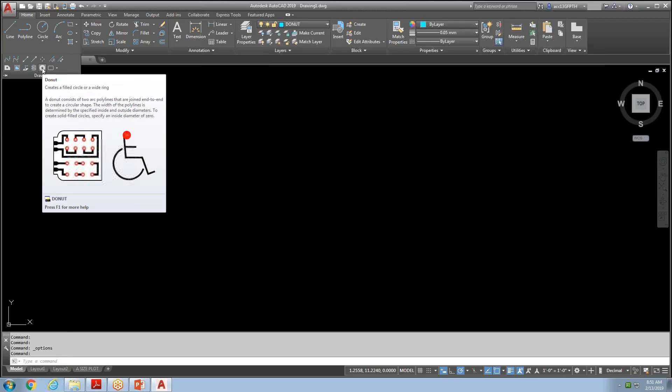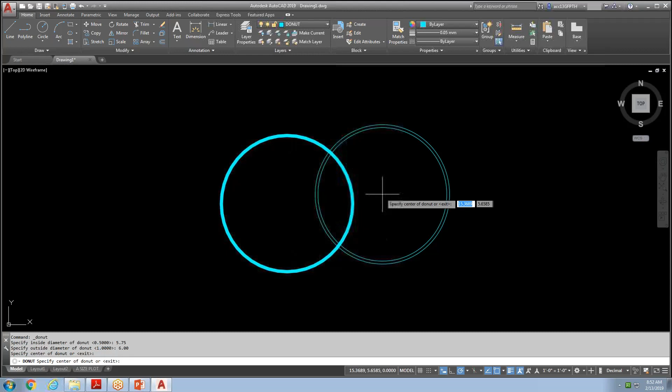So I click on donut, and the first thing it asks us for is the inside diameter, which is 5.75, so we hit our enter key. Then the outside diameter is 6.00. You put in those two, it prompts you for them, and you hit enter. Then you have this donut that you can click and place anywhere you want, and when you click it, boom, you now have a donut drawn. It's really just a polyline, but that's what it says.

So we have that on the donut layer, and now we're going to concentrate on the other circles that go around the outside of this. You'll notice some dark blue circles, and their dimensions are called out over on the right—you see a diameter, and the biggest one is a diameter of 8.25. So let's do that one first.

So we're going to change our layer here to circles, so these are going to be dark. Then I'm going to go to circle, center diameter, and you guess where the center is going to be—it's going to be right there.

Okay, go ahead and wait till it lights up, and I click on it once I can. Boom, 8.25. Boom, that's that one.

And then I repeat that by going here, and I want to go ahead and make another one for 7.25, because there's another one at 7.25. So I want to make sure that's my diameter, 7.25. And we have that, so we have a couple of those circles.

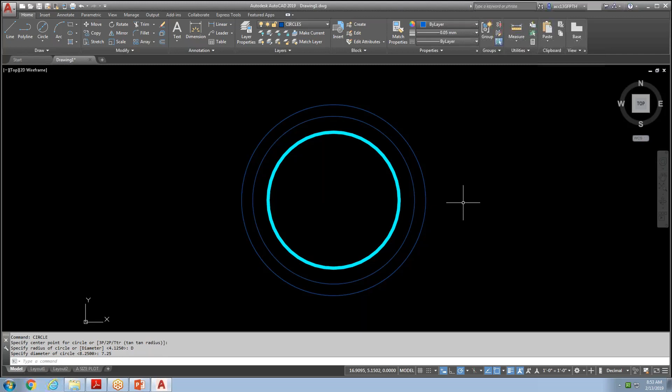And there's one more circle that's a diameter 4.5, and that's called out at the lower right. So we can go ahead and draw that. Same thing, circle diameter, make sure we get the center point, and it's 4.5. Boom, we're good to go.

So now we're getting there, and we have our donut, we have our basic circles. All right, now it gets a little bit tricky because now we have to draw a polyline, and the polyline is called out in the upper right center area, and it says P line 0.05 width.

Now a polyline can go into a drawing just like a regular line with no width assigned. So if I change my polyline's layer, and if I go to my polyline command, you'll notice that I can just go ahead and put in my line segments like this. And once I do that, you'll notice that it's different than a line.

I'm going to draw a line over here. So my line is on the left, and you'll notice that these are all individual segments. They can be broken off into individual segments, so they stand alone, each one.

So the line does it that way, but the polyline makes them all one. That's the biggest difference between the two. There's a few others, but that's the basics. So I'm going to go and get rid of that.

And if you double click on a polyline, it goes into the polyline edit command. I double click on it, and it says down here, polyline edit, right down here, it's asking you to do something. So we've got polyline edit right now.

Now you'll notice that there's a bunch of options, one of which is width. You can change the width, you can close it, edit the vertex, a lot of different things, spline it. I can go to width, type in 0.05, and this is asking me to specify a new width for all segments. So watch what happens when I do this.

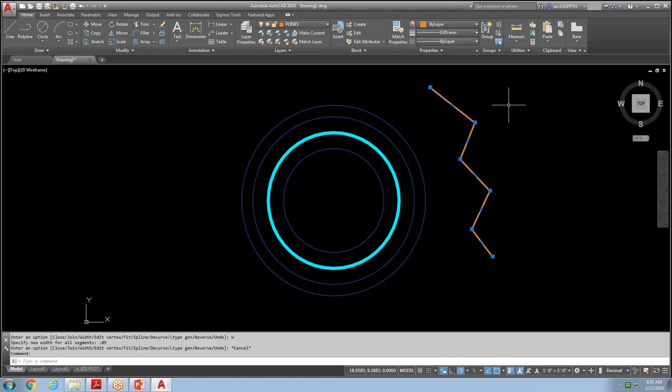So watch how this works. We're going to get rid of that, and I'm going to create a polyline at the top. Now, I have to use my Quadrant object snap, and that's not turned on. So I go down here, and I go to my object snap settings, and I turn on Quadrant, because I'm going to want that.

So I go there, I start my polyline again, and I draw it from here, and I want to go to here. Except right now I can change the width if I want to. So as I'm in this right now, before I go ahead and click it, I can go ahead and right-click my mouse and choose width. And it asks me for a starting width. Now my starting width and my ending width are going to be the same.

So see, it says down here, starting width. So what I want to do is type in 0.05 for my starting width. And then it asks me for my ending width, and you'll notice that the default is 0.05. So if I hit my enter key, it'll accept that value. I hit my enter key, and now we're good to go.

I'm going to go up to here, and I can go ahead and drop this right down to there, and boom, I have drawn that.

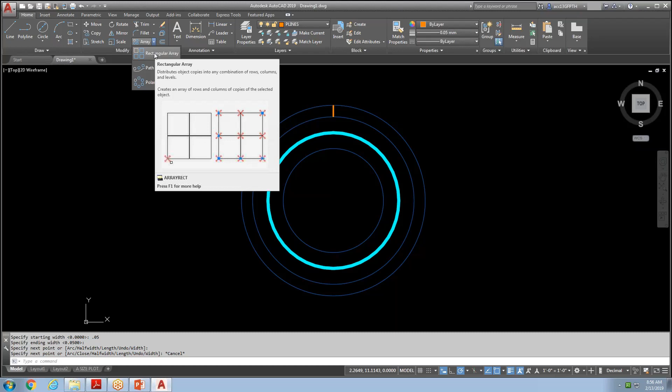So now I have my polyline. Now I just have to copy it 48 times around here. How would I do that? Well, there's a wonderful tool in AutoCAD called the array command. The array command can give you a rectangular array, which is essentially copies in rows and columns, or you can do a polar array, which allows you to do an array of items around a center.

So I'm going to click on my polar array, and I'm going to grab this item right here. I click on that, and once I click on it, I'm done selecting objects. So once I've selected objects, I can right-click my mouse, hit my enter key, or hit the space bar, and it brings me to the next prompt.

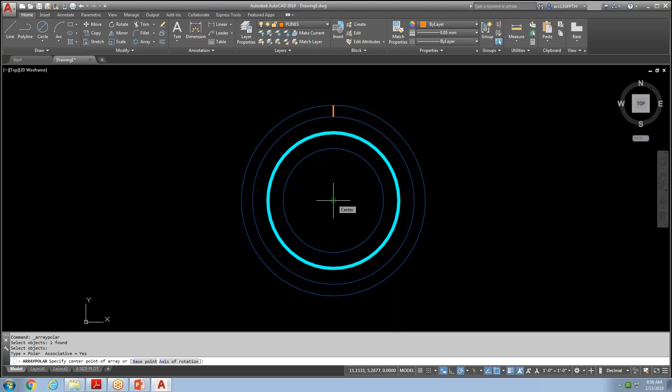Now watch what happens. I'm going to right-click, boom. And when I do that, it asks me for the center point of the array. The center point is going to be the center because I want them all to revolve around here. So I click there. Now you'll notice it's giving me, by default, 6 items, and the ribbon changes. This is my polar array ribbon.

So now I'm going to go up here and change it to 48. Go ahead and make 48 copies around that center. You'll notice that they show up right now. I know those are perfect because I've done this drawing many, many times, but that's what it's supposed to look like. When you're done, you click on Close Array, and you're good to go.

You'll notice that these are all one unit now. So each of those polylines that make up that 48-piece array, it's all one now. If I wanted them not to be anymore, I could explode them, which is right up here. The explode command allows you to explode an object.

So I click on this, and I've exploded. These are all individual elements now, all individual polylines. However, I don't want to do that, so I'm going to go to Control-Z to undo it and bring it back and make them all one again. So anyway, we're good to go. I've got that, I did an array.

Now you'll notice in the drawing that there are green lines, and the green lines are also arrayed around, only those are not polylines. So for that, I can just use a regular line command. I'm going to change my layer to lines, go to my line command, and go up from here, down to here. I'll click there.

Now what I can do is create an array in the same way, and there's only 24 of these. So I'll start the array command, and the array command is here. I go here again and click on my object. Then to get to my next prompt, I right-click, hit my enter key, or hit the space bar.

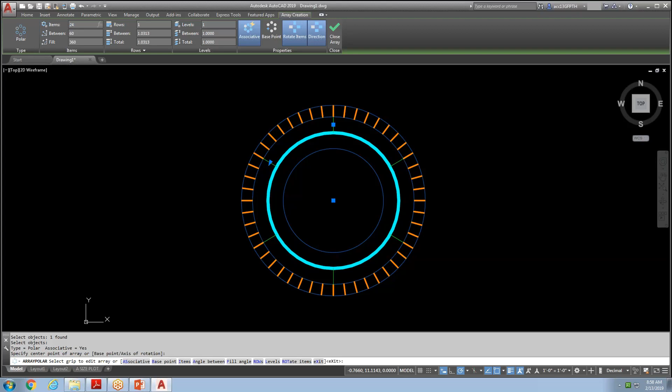This time, I'll spice it up and hit the space bar. Now I'm going to give it the center point of the array, boom. And now it's also giving me 6, which is the default, and that's got to be changed to 24. Boom, and that is that.

So now I've got a lot of my information here. I'm going to go ahead and save this as drawing H, just so I have it. I'm going to call it drawing H. I like to do it all capitals just because I do. Drawing H. Boom. All right, now that is the toughest part right there.

Now the rest of these are just basic lines. Okay, now I'll do these just to show you how they work.